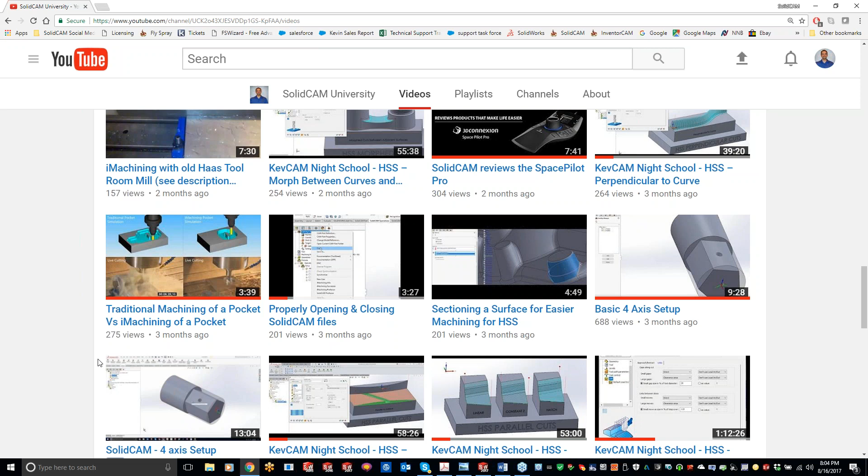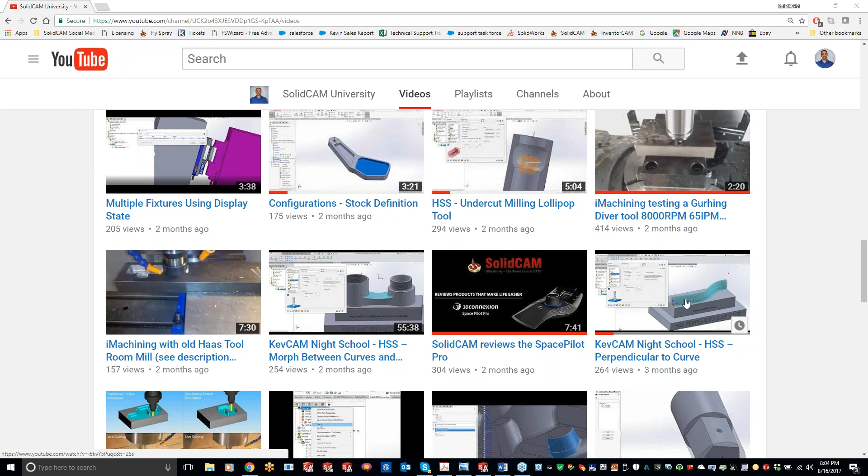But I guess with that being said, let's dive into the multi-axis roughing. So multi-axis roughing is kind of a niche, I guess, for the 5-axis side of things. And multi-axis is more or less just for doing pocketing in a 5-axis environment.

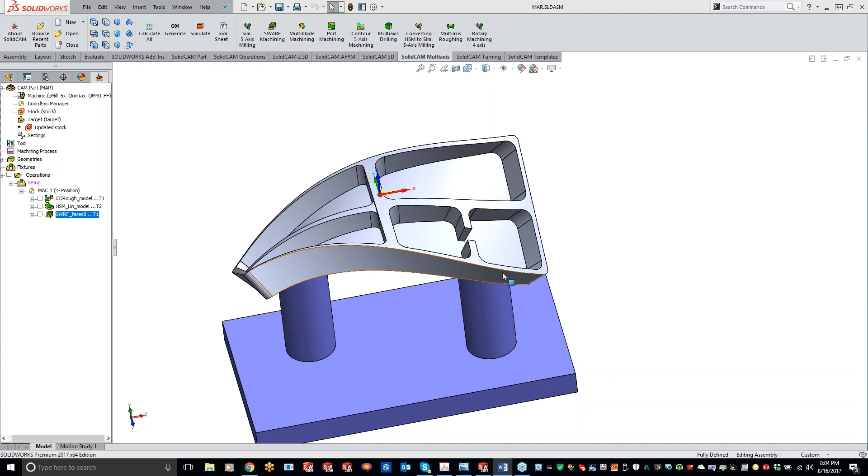So you'll see we have a pretty radical aerospace part right here. And what we want to do is, normally we would have to separate everything off, and we're not going to be able to contour to that floor, the wall surface, or the ceiling - it's just going to be straight lines going across and machining that out. So to actually get down in there and get a good roughing 5-axis cut and get that material out of there, we're going to want to use our multi-axis roughing.

Now there's a couple different options in there, and it's pretty simple to use, but it's kind of a niche area. Personally, I haven't used it very much on the 5-axis side of things, just because it takes that special part that might need it. So a lot of those aerospace parts, or if you guys are looking at doing a bunch of pocketing on a curved surface, this is where it's really going to shine for you guys. So now the curvature doesn't matter.

The sidewalls don't matter either, but we do need to have a floor and sidewalls for this tool path to work. So more or less that's for the pocketing side of things. With that being said, I got this part kind of roughed out.

So we just did some 3D machining, some HSM, and I'm just going to simulate the swarf machining here. We're going to get to swarf machining in the next couple classes, but I want to show you guys what we're starting off with on the machine sim, and then you can see where we're going to take it from here.

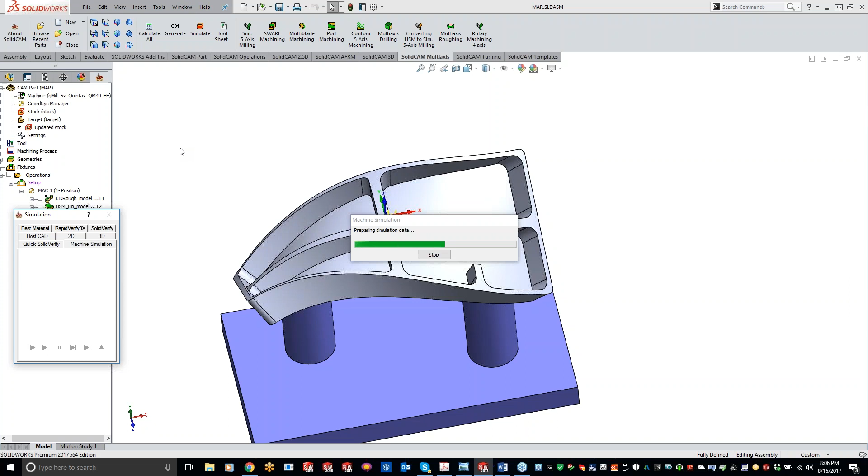So I'm going to load up this machine sim here. Now this 5-axis machine we're using is fairly large, so it does take a hair longer to pull up the machine sim. Alright, now we're getting everything loaded up in here.

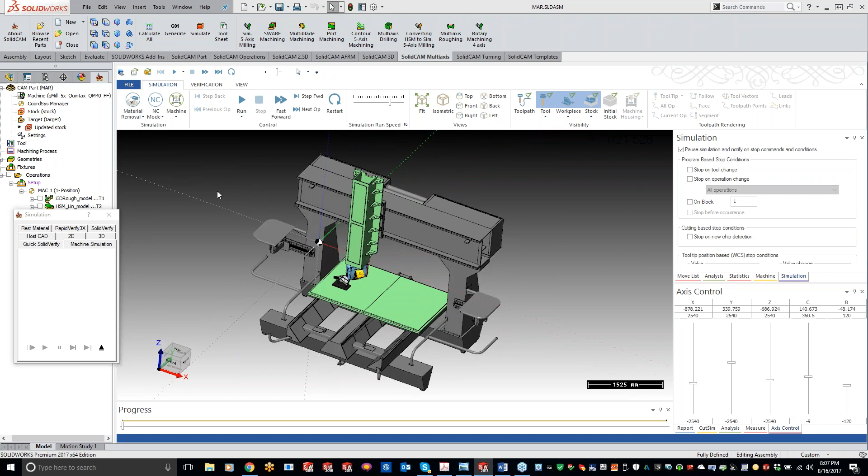Okay, Norm, is this the machine sim that you were kind of looking for? Let's see if he pops in here.

Okay, so it's just got this bolted down to a big table here, kind of using like a 5-axis router. But now we're not using a trunnion to do the 5-axis, we're going to be using this head here.

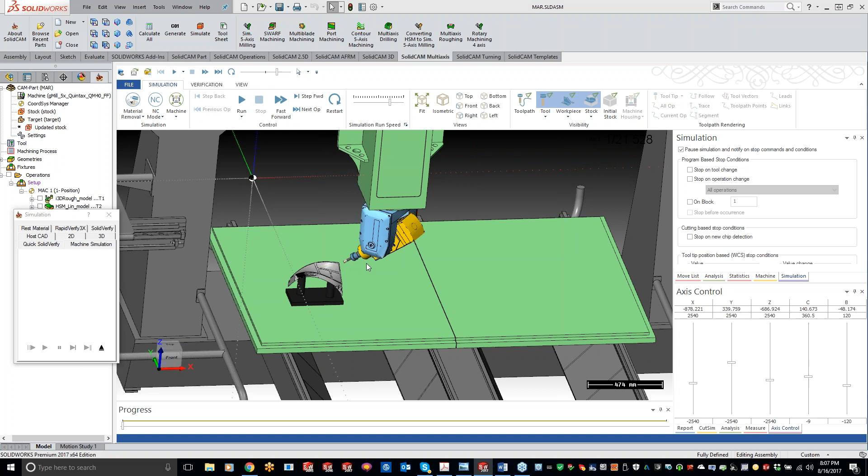So if we just go ahead and play this through here, just kind of going around the outside perimeter, getting everything machined off. You can see where we left off here, let me zoom in. We just got everything roughed out - everything but those pockets inside, the center there.

I can speed this up just a little bit here.

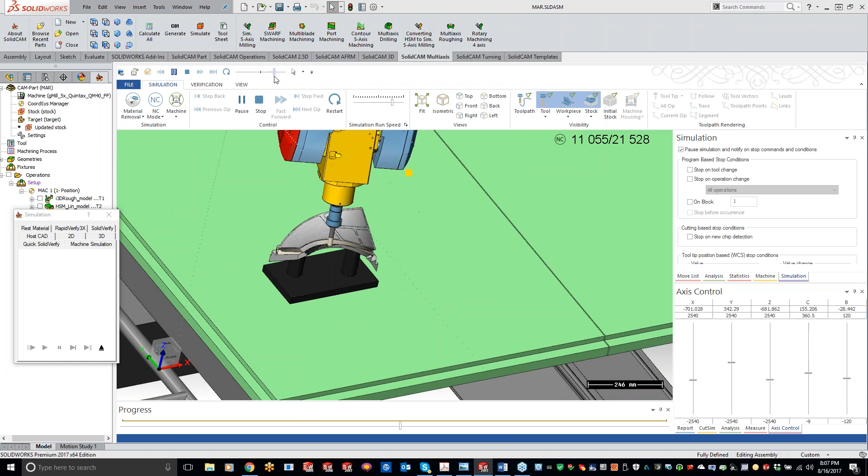Hey Kevin, looks like Norm has a question. Or just answering your question. Oh yep, yes, very very similar to ours.

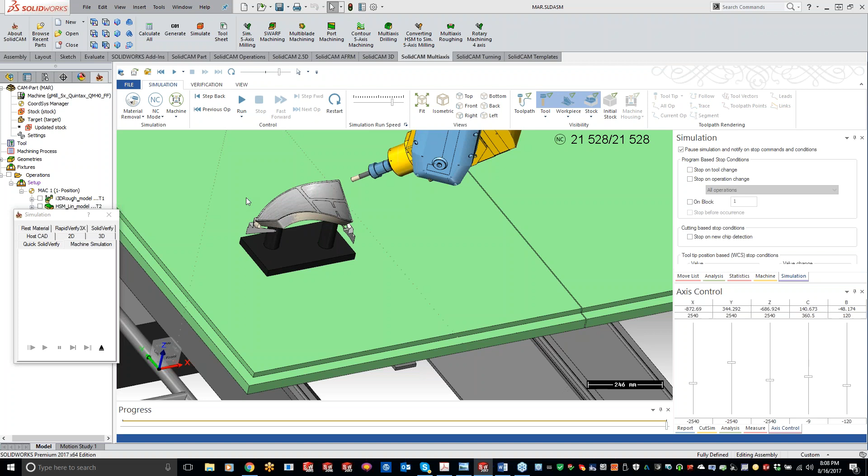Perfect, thanks Norm. Norm, do you have a machine sim for that machine? I got your post that you sent me, or I got the post from the posting, but they didn't have a machine sim on file for you. So if you do, Norm, definitely send that over to me in an email and we can actually use your machine - not next week, because Justin's going to be doing a pretty sweet impeller, but the week after that. Yes, I do. Perfect, yeah, send that over to me, Norman, we'll get that put in here too.

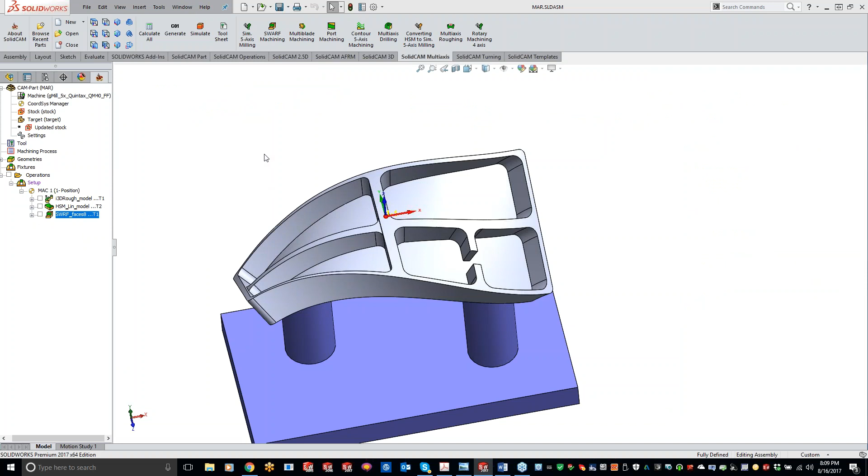So alright, here's kind of where we left off. We have everything basically done all the way around the outside of this goofy part here. Started off with a big block here, but now we need to get in there and rough out these pockets in here. So go ahead and exit out of here, and we'll go ahead and grab our multi-axis roughing.

So we only have one option, it's radial roughing right here. So we can hop down to our geometry.

Now we have a couple different strategies here. We can use offset, which is going to do kind of like a pocket style, where it starts in the center and just works its way out. Or we can do adaptive, which is going to do a spiral. So two different tool paths we can pick from.

Now one other thing is we can do an offset from floor, so the tool path is going to follow the curvature of the floor, or we can do offset from ceiling, so it's going to grab the curvature from the ceiling and work its way around that part.

Or we can do kind of like a morph between boundary curves between the floor and the ceiling. Like we were talking about with 5-axis morph between boundary curves, it's going to take the top and the floor and merge them together. So at the top we're running flat, but then when it gets down to the curvature, it's automatically going to start curving around there.

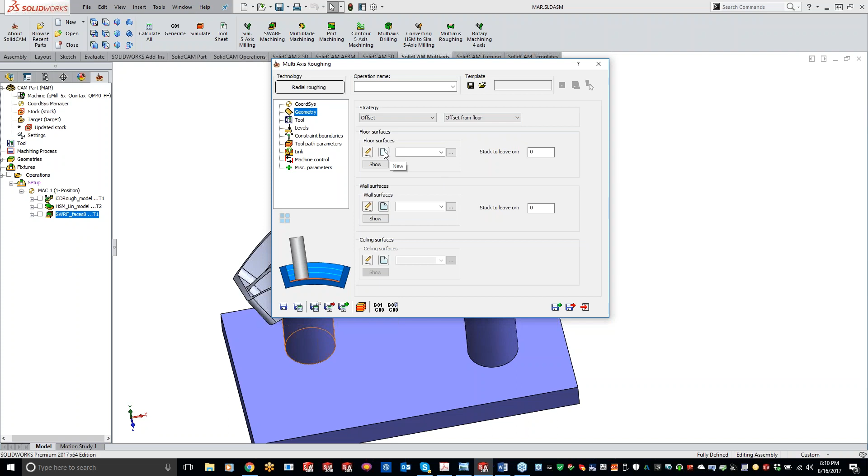So for this one we'll just do an offset from floor, and basically just pick what floors do I want to work on. So we can go ahead and grab these 4 floors here - those are the 4 floors that I want to work on.

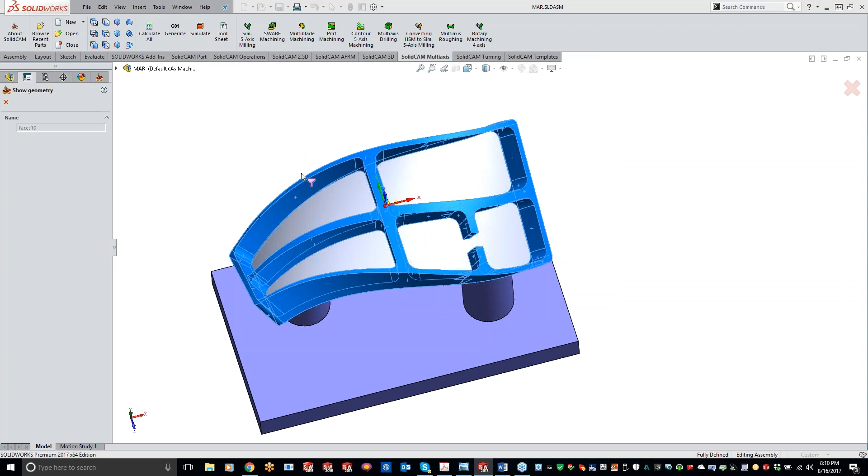And now the wall surface. Now, I already went through and grabbed the wall, but here I'll show you. Grabbed pretty much all the walls that I could here. Now, one thing is, and actually going to be going to development with this, but you guys, when we did

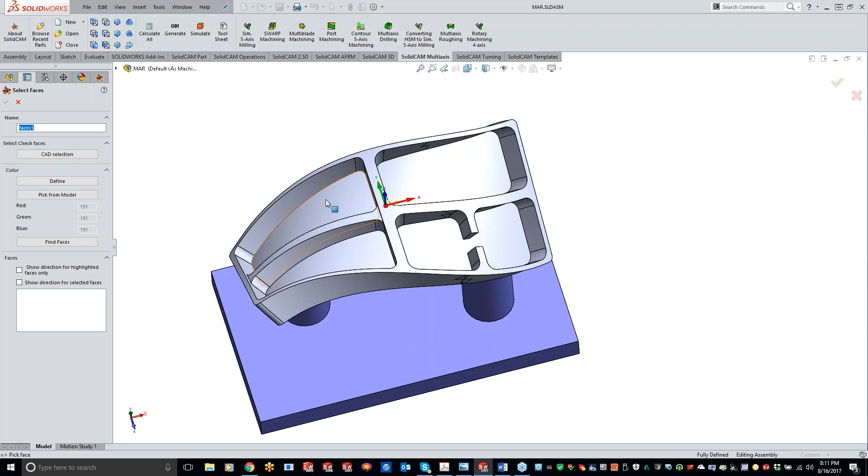the HSS and the check surfaces, there's that button over here where you can say all adjacent surfaces. I'm going to see if they can add that in for us here. I think that would really help out because, when you're working on the multi-axis roughing here, pretty much anything adjacent to that surface is what we want to use as our wall, since we're using pocketing. So I'm going to see if they can get that added in there and save a little bit of click time for you guys.

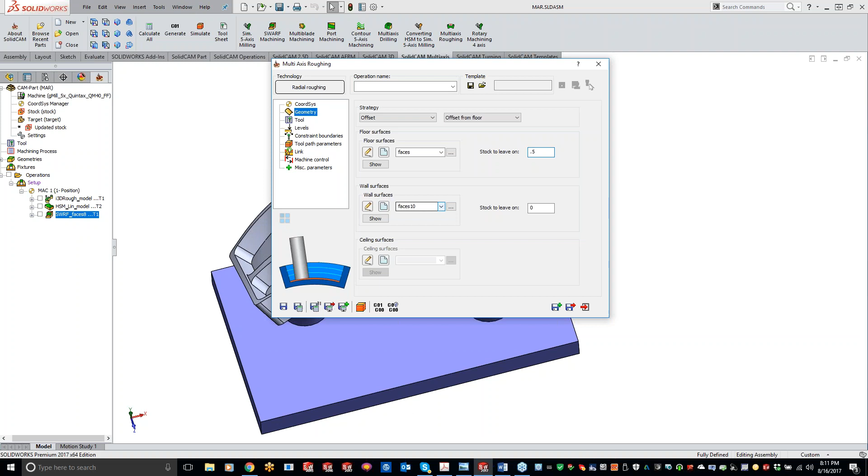So that's the floor surface, the wall surface. Now in this one, since we're just doing offset from floor here, I don't even need to pick anything on the ceiling surface. And we'll do a 0.5 millimeter floor and a 0.5 millimeter for the wall surface there. So we got something to come up and clean up here.

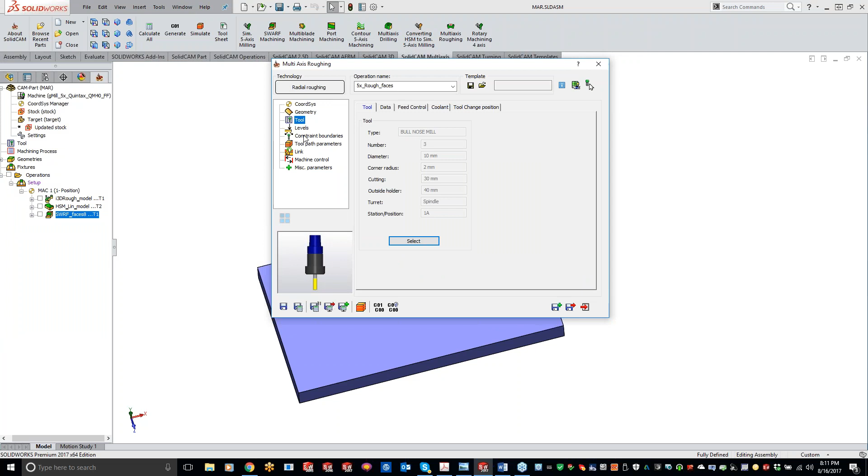And we can go ahead and grab our tool. And we'll grab this 10 millimeter end mill here. Levels, not much in here. Pretty much everything's kind of locked down. The only thing you really have in here is retreat distance, your safety distance, and exit distance, so you can change those around a little bit.

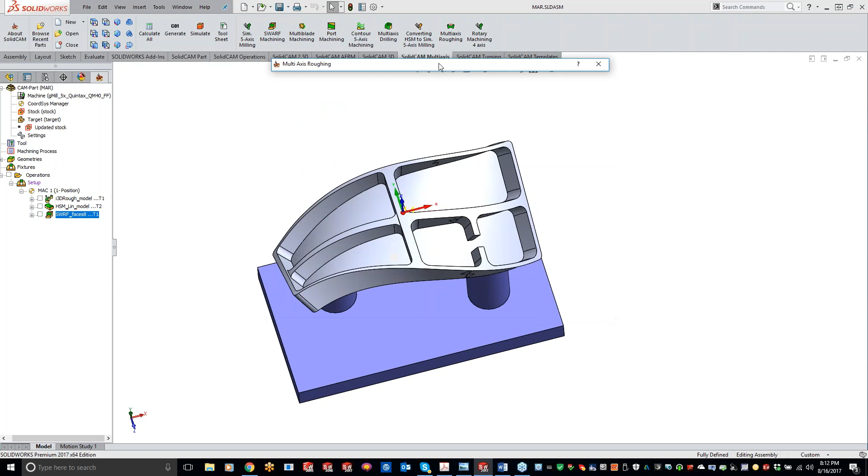Advanced, nothing we can even pick in here. Constraint boundaries. Where do you want to constrain it to? Now, a lot of times, depending on what you're doing, but for this particular one, since I'm wanting to do this entire area, I can just leave it on automatic. But if you guys wanted to, just like HSM, you can come in here and do manual and do a chain around anything that you want to kind of constrain it to a specific area. So kind of a little bit of HSM in there for you guys.

Now, when we get into the guts of things, right here is your step down and your step over. So for this particular part, let's just do a step down of 5 millimeters and step over of, let's go 4 millimeters here. So that is your step down, step over.

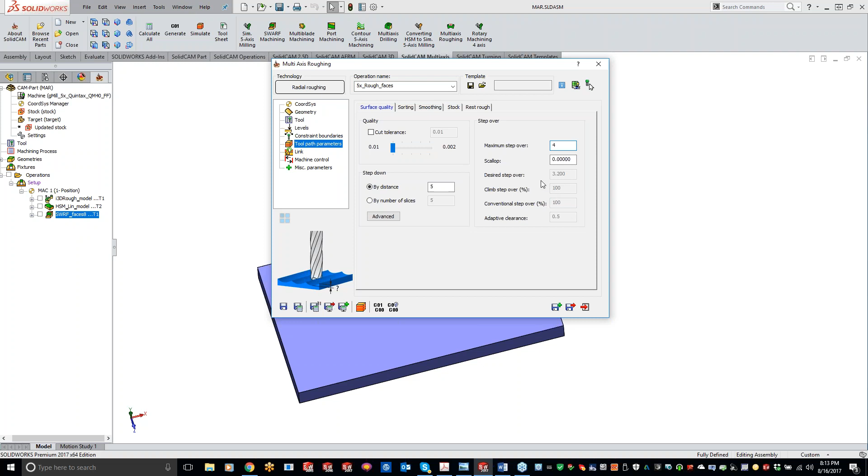Now you'll see right here, over here, we're grayed out, and we don't have that option to change those right now. And that's just because the geometry you picked was offset from floor, but the strategy is what determines that. So when we switch this over to do the adaptive or the spiral, these options will actually open up for you.

So think, and if we go to sorting here, we can do zigzag, climb mill. We can do machine by levels or regions here. Smoothing is just kind of, this portion right here, the default works very well, but basically, do you want to have smooth corners, or we're going to do the sharp 90-degree corners? And same thing with the final cut. And then, if you want to do smoothing between the links, so as we're going from one pass to another pass, it's going to do a little bit of an S curve right there, going into the part there. And you can change up those percentages there.

Now, the filtering right here is basically, you can filter out if you had a hole inside there, so the toolpath isn't going down inside there. And you can pick inscribed circle. What the inscribed circle is going to do is automatically create an inscribed circle to prevent the tool from entering at extremely tight areas of the geometry. So if we're using a 10 millimeter end mill here and we have an 11 millimeter hole, that's going to pretty much stop it from going in there.

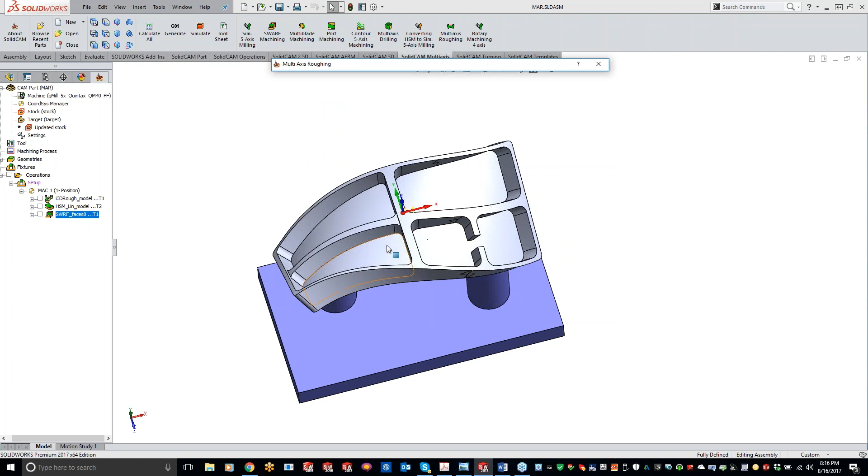What I'm talking about is like when it's working from this section and then coming over to this section, I want to come up to the clearance. But what I want to do is use a ramp going in there, and same thing between my slices. Since it's going direct, I like to go back up to the rapid, and then I can use my ramp. Same thing between regions here, so we can use a ramp right there.

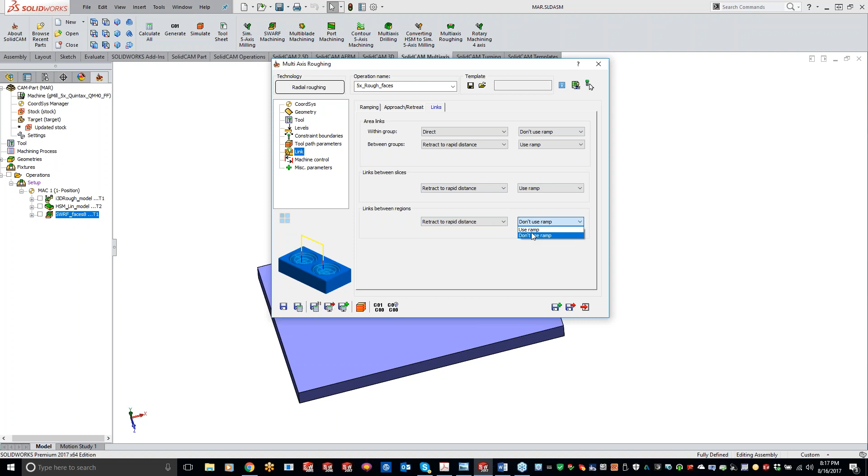One other thing I wanted to mention is your surface quality settings—these are set actually quite tight. What I notice is with the cut tolerance, since we're roughing, the cut tolerance really isn't that important. If you think about it, we're leaving 5 millimeters on the wall, 5 millimeters on the floor, so you guys can open this up. On this part, since we're working metric, I'll just do 0.1 millimeter, and that's going to save you calculation time too, to speed things up.

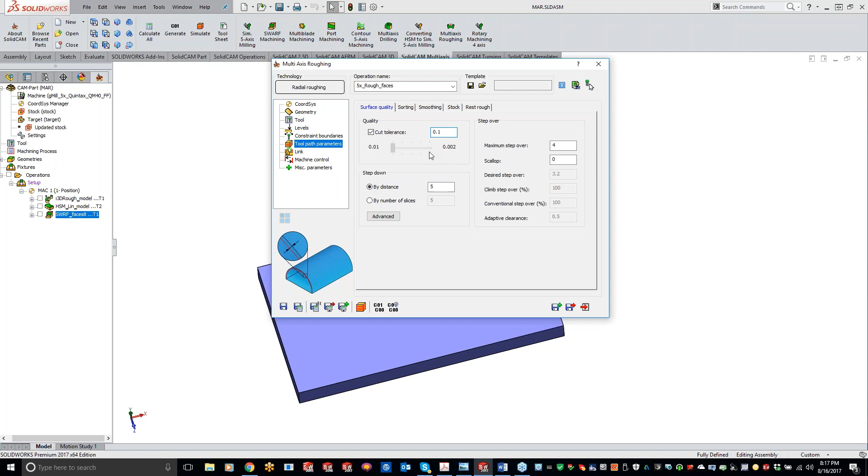So let's go ahead, I think I got everything covered here. Machine controls is your 5-axis stuff. This is the same in pretty much every operation inside SolidCAM, and same thing with the miscellaneous parameters. So with that being said, let's get some toolpath on here.

Now, unfortunately, my computer may just be a little bit slower right now because we just finished doing a live iMachining cut literally 20 minutes ago, and it's still rendering out the video. So it may just take a few minutes or a few seconds longer here.

Any questions with what we've covered here so far? Like I said, this one's a little bit more of a niche kind of area, but it works very well.

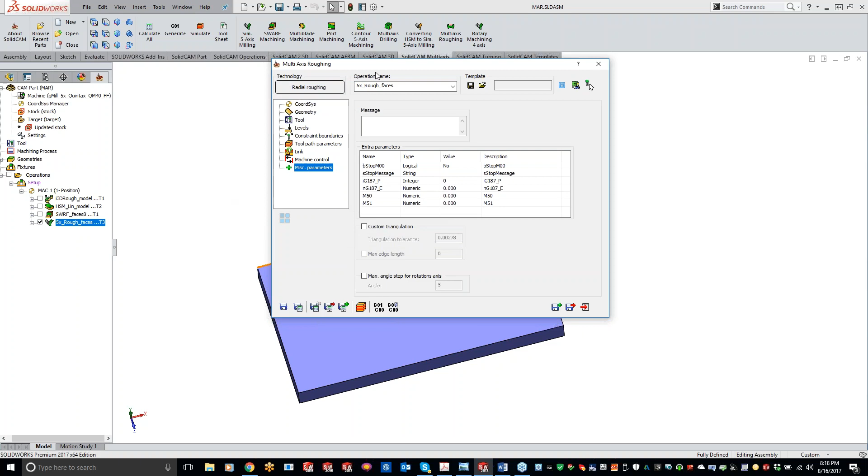Okay, so you can kind of see our toolpath. Let me get a little side view here. Our toolpath is following the exact curvature of that floor, going all the way around there. To get a better picture, let's do a simulate, and we'll start off with solid verify first—get our updated stock going here.

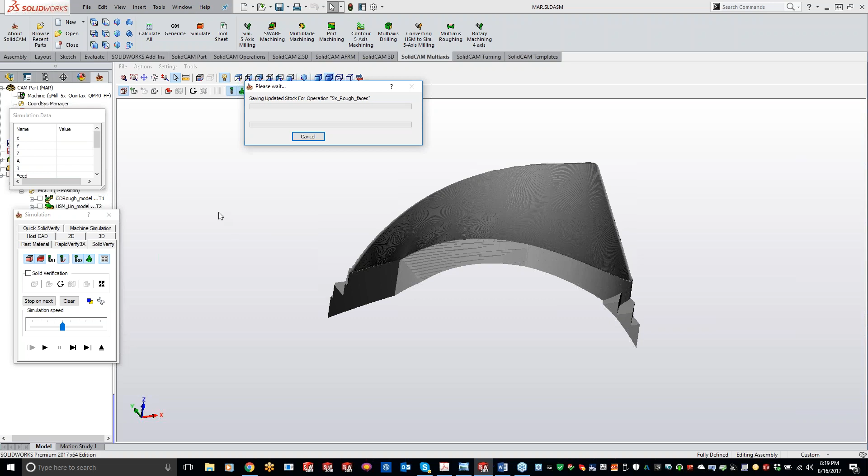Come on—boy, that video rendering is really bogging down my computer right now. Okay.

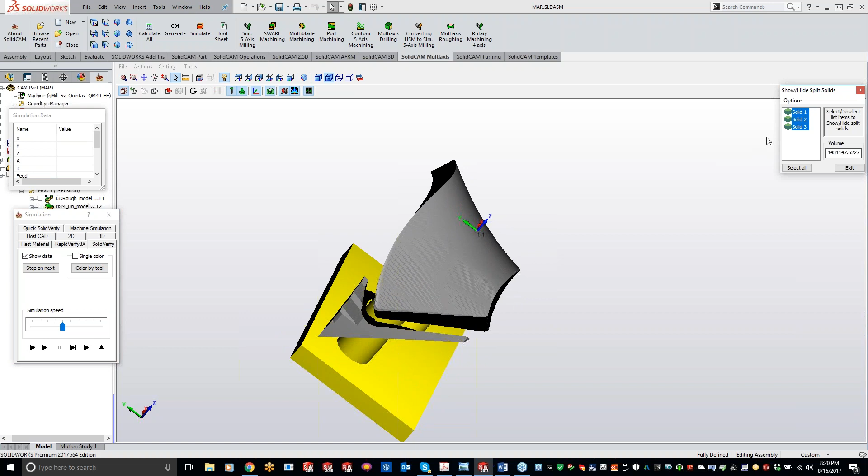So we've got our part in there, and these are just the pieces that were left over. If I want, I can come in here—I think it's this guy. No, that's my fixture. And I can get rid of those slugs that would have fallen off there.

All right, let's play this through here, and I can speed it up here. So you can kind of see the tool is following the curvature of everything that's going on there. Oh, and one thing I'm noticing here, you'll see I didn't go down to the full depth, so what it's doing is coming over and doing each pocket at that level, moving over.

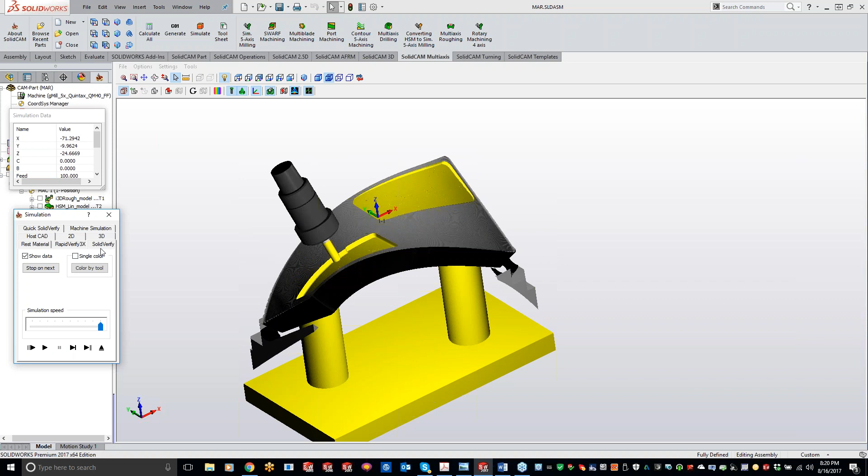Let me just stop this for a second, and let's get that fixed.

So if we go to toolpath parameters, let's see where they hide that at. Toolpath parameters, sorting, and I'm going to go by region. So what that means is it's going to work on one pocket, get it all the way down to size, and then once it's finished off in that one pocket, it's going to move over to the next pocket.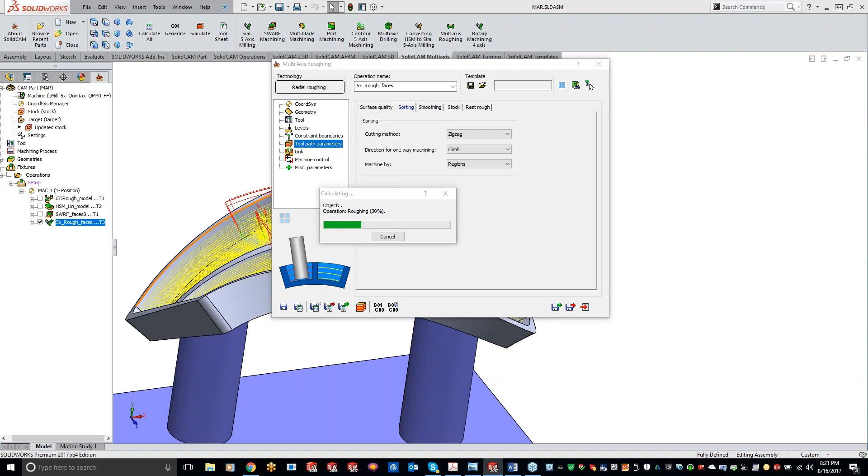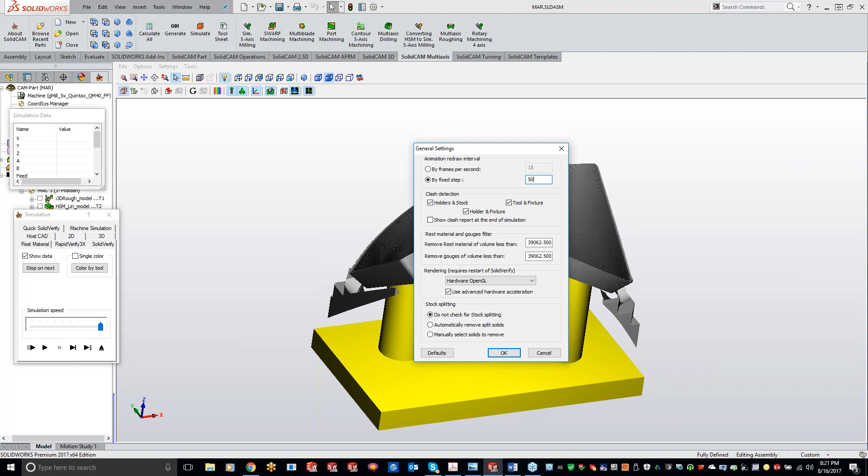I'm going to simulate this here. Do solid verify again. And I'm going to bump up, let's do every 50 lines of code here.

So now we're kind of staying within that one pocket, and then it will bounce over to that next pocket here.

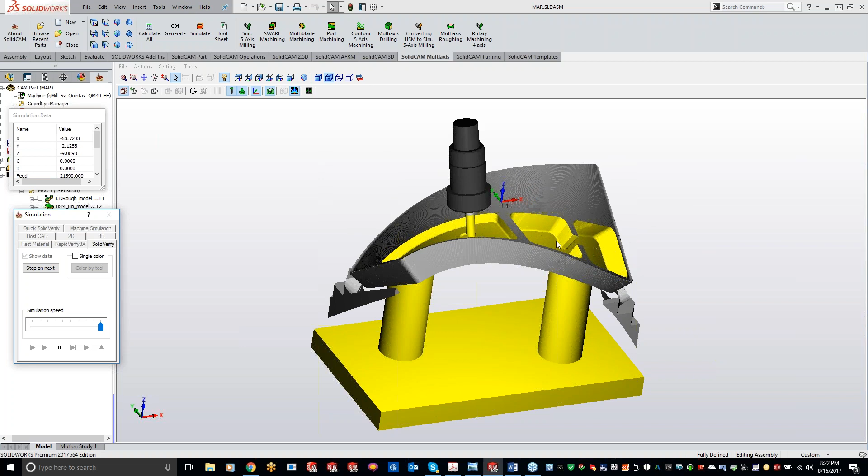Now, one thing that I found is you don't have much control on where it goes from the pockets. Even though I think I picked over here starting on this pocket when I click those faces, it really is out of our hands where it goes. I think it just kind of goes by the fastest route possible when you do by regions instead of by lanes.

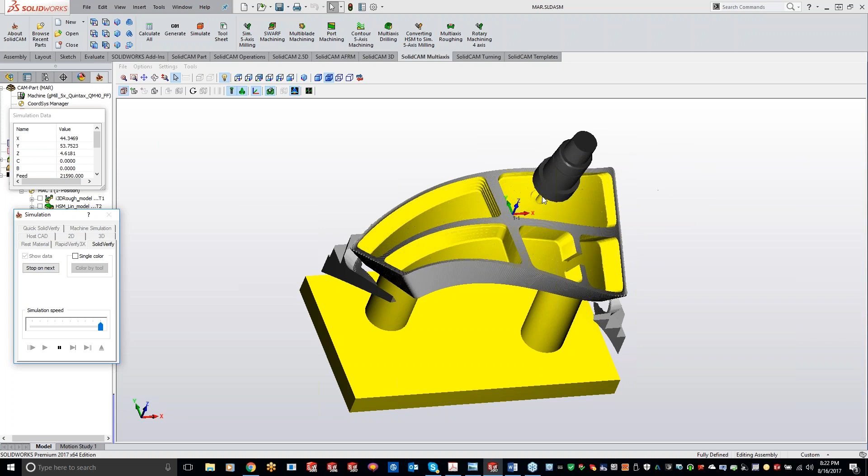But let's stop this and let's hop over to machine sim, and show you guys how that head is moving around in there.

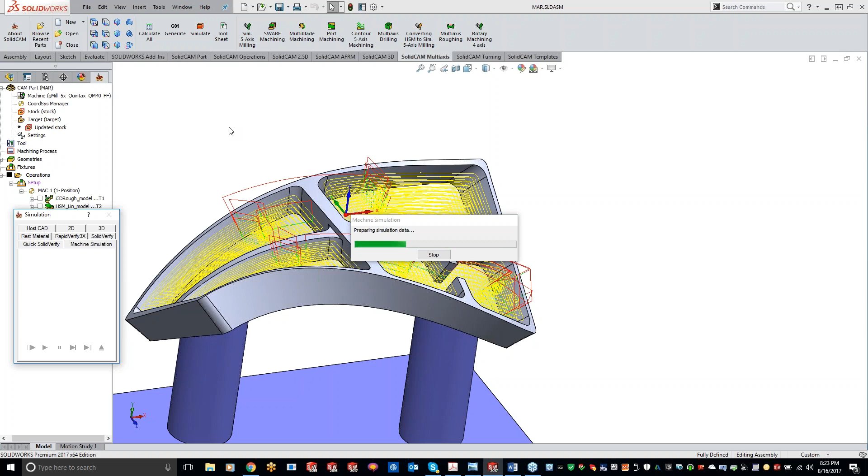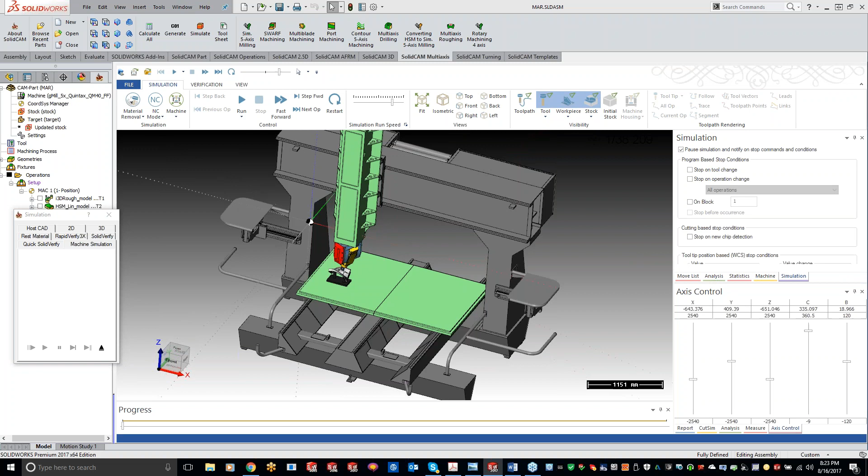All right, get everything loaded up here. All right, let's get zoomed in here. And slow it down a little bit here. You can see the head really working its way around in there.

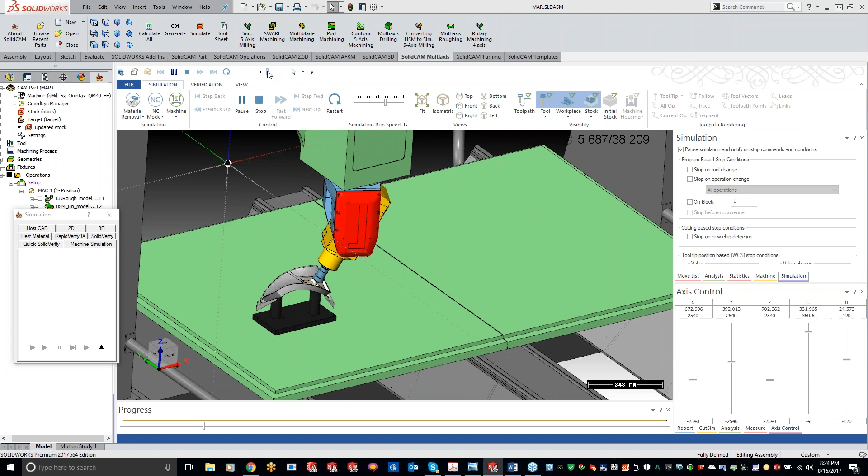And then each time it's going down in level.

Hey Kevin. Yeah, looks like we got a question and then a follow-up from Ben. Can you see that, or you want me to ask it to you?

Can you make a smaller hole and then enlarge? Yeah, I don't know if that's easier there. Let me... Okay, but I can't even be trusted to read the questions. That's how little I know about what I'm watching here, guys. So I'm learning a lot.

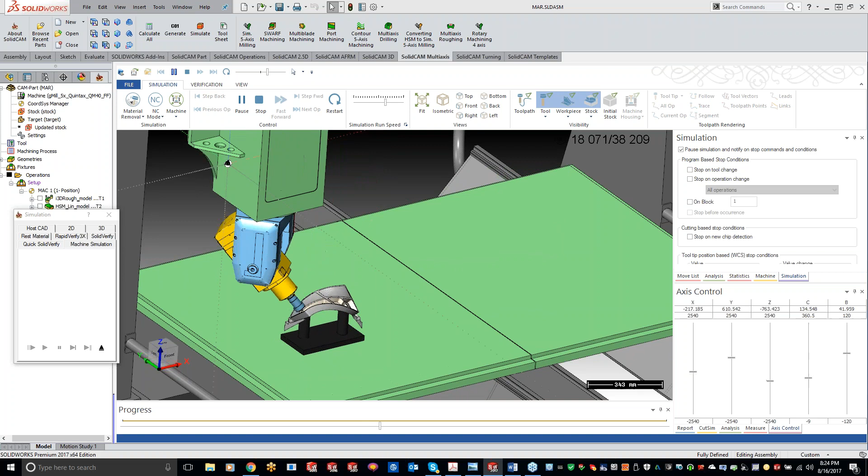Okay, so can you make a... Ben, are you talking like do a pilot hole, and then it approaches in from the pilot hole? Let me check here, once this gets done playing through. I don't think so, I haven't really played with that portion of it, but let me see if we have the option for that.

Can I give you a different view here, you guys? And is everybody able to see that machine sim working?

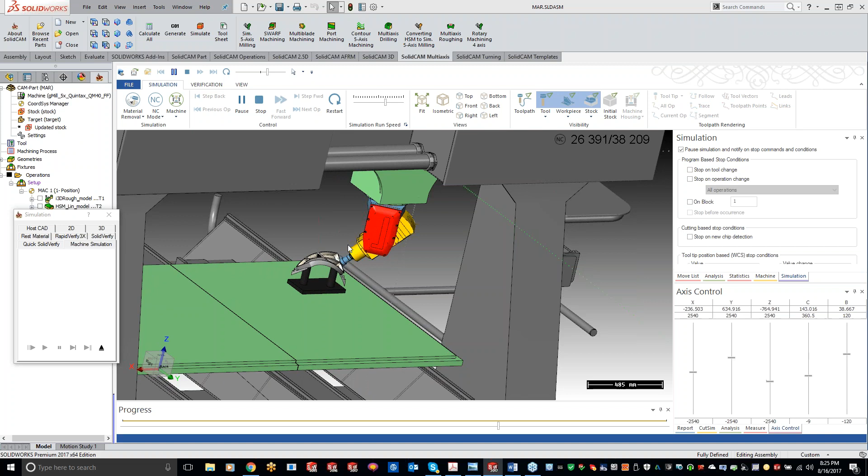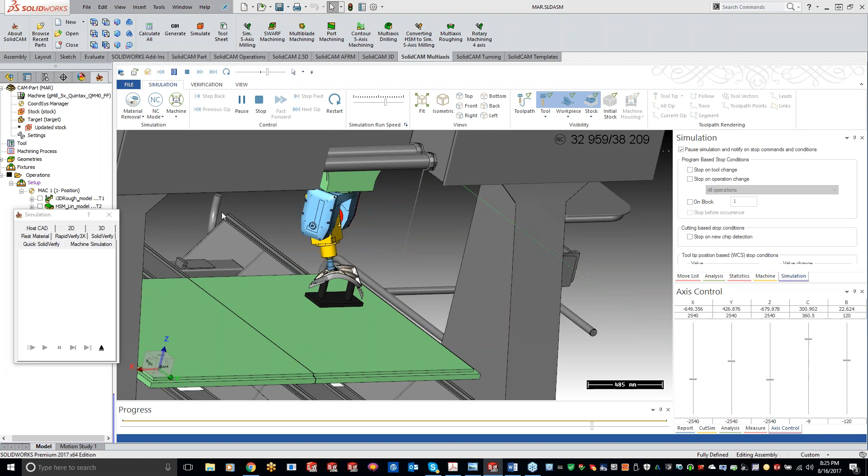What are you saying, Andrew? You couldn't program this part? I could do it in my sleep. It wouldn't look like that, but I could definitely do something. And for those of you that don't know, both Andrew and myself have very young kids, so we don't get sleep period as it is.

All right, so yeah, that's probably what I should do with my nights. Instead of even just pretending that maybe I'll get some sleep, I'll just go through and take all your classes. So yeah, there you go.

We got another question or follow-up from Ben. All right, the reason I was asking was to use more of the tool length for roughing. Yeah.

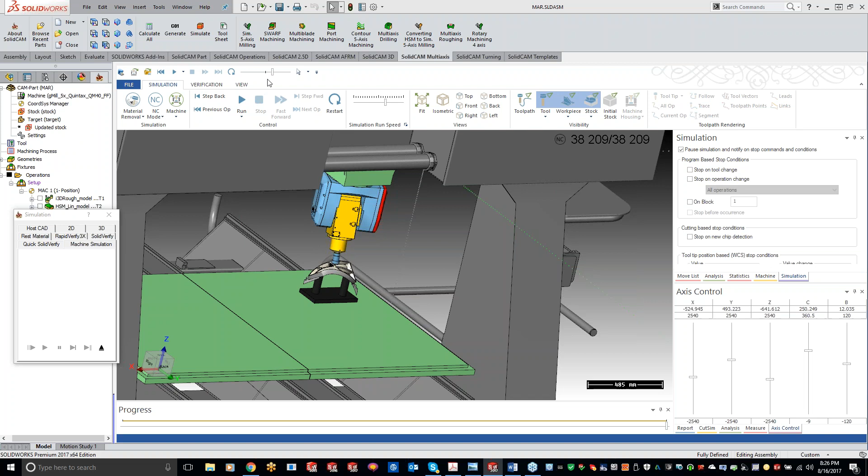Let me hop out of here. And so if we go down to the toolpath and surface quality, I can take a larger step right here, but let's get into the link here and the ramping.

Now, I guess I don't have a hole in here, but I don't see any option. But let me tell you what, Ben, let's see, was it Ben? Yeah, Ben. Let me do some digging on that and see if that's a possibility, that if we can start off with a pilot hole, that way we're not wasting the time doing a helical entry going down in there for you guys.

But any other questions on this particular toolpath?

And great question, Ben, too, by the way.

All right, so now we've got a couple here. Hang on, we got... No, I think we're good here. Oh, that's it, sorry, yep.

False alarm. Okay, maybe I can come down to Atlanta and see what we can do. Oh, absolutely, Ben. Come down and Ken will get you all straightened out.

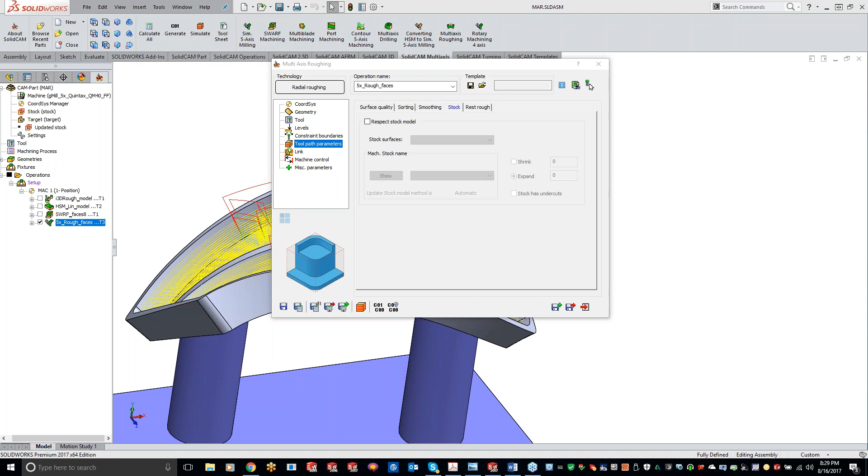But okay, so now we have the center completely roughed out. Now what I can do is kind of use this as a finishing toolpath too. So what I'll do here is open up this operation, and I'm just going to do a save and copy here.

Our geometry is going to be the same, but now what I'm going to do is switch it over to adaptive and show you guys the spiral and finish off the floor, I guess. So what I'll do is take off my floor finish, or my stock to leave on the floor.

And then the only other thing I want to change up here is my surface quality. Since I have everything pretty much roughed out here, I can take this all in one step and just come down, because I just had that 0.5 millimeter left over. So instead of doing by distance, I can do by number of slices, and I can change this. Basically, think of slices as cuts, by number of cuts.

So when we do 5-axis, you guys have the option to do limit by number of cuts. That's basically kind of what I'm telling it to do right here.

Now you guys also see that since I switched over to adaptive, I get a little bit more options here. I'm going to leave everything kind of as default, but you can do a desired step over. Right now we're doing a maximum of 4 millimeter step down, or step over, but I can put a desired number in there and get a little bit tighter of where I'm going.

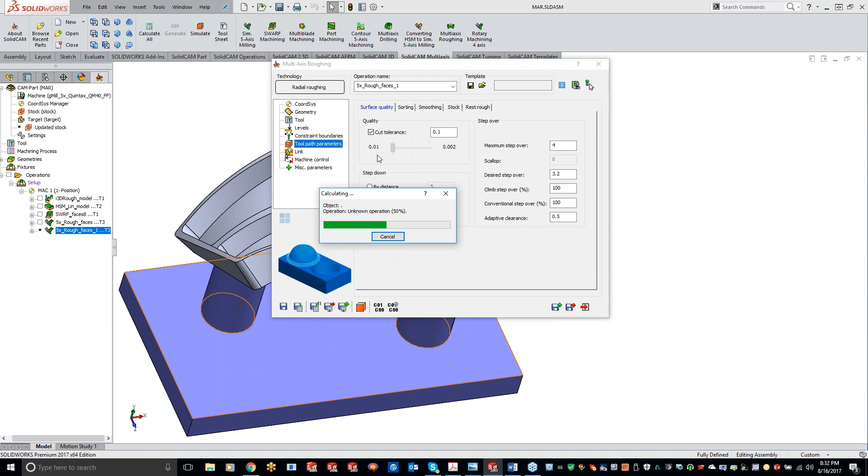Now, I can set this down to 0.01 millimeters, which is pretty tight, but what I noticed is I'm getting quite a bit longer G code and longer saving calculation time, but I'm getting the same surface quality as before when I had a smaller versus larger cut tolerance. So definitely feel free to increase that cut tolerance, you're going to get the same results.

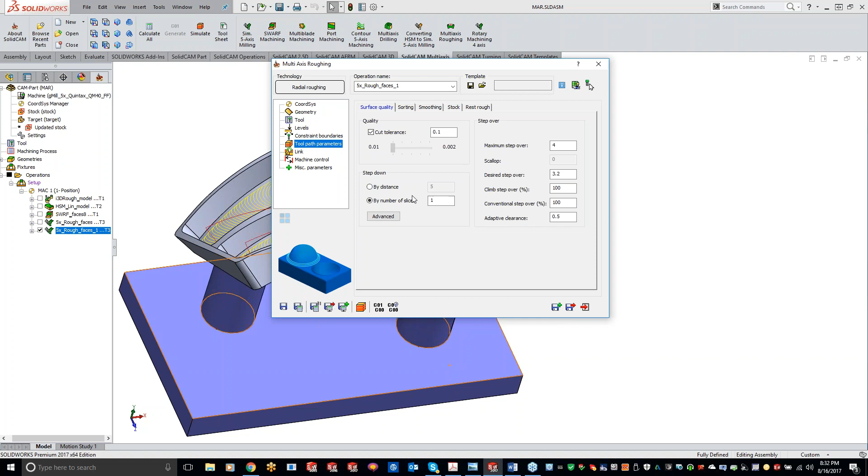Ben had mentioned here about the tool - you got to watch out so the tool doesn't load up when plunging. Yep, absolutely, we've had that scenario. We were actually doing a live cut with that scenario, doing a helical ramp in there, but it was almost a plunge cut.

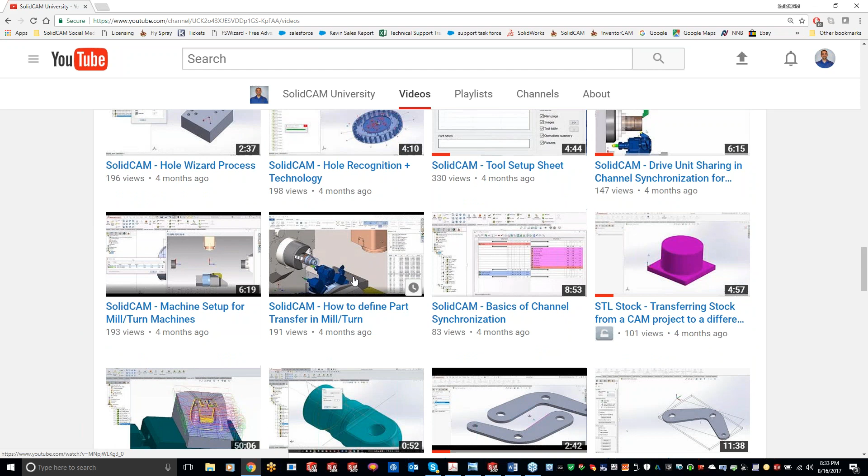For those guys that haven't seen, I did a video - let's see, it's a pretty cool one, let me see if I can find it real quick. It was using that Gurhing diver tool. It must be up here. For the record, Ben, I thought the same thing when I was watching that. Right here is that Gurhing diver tool.

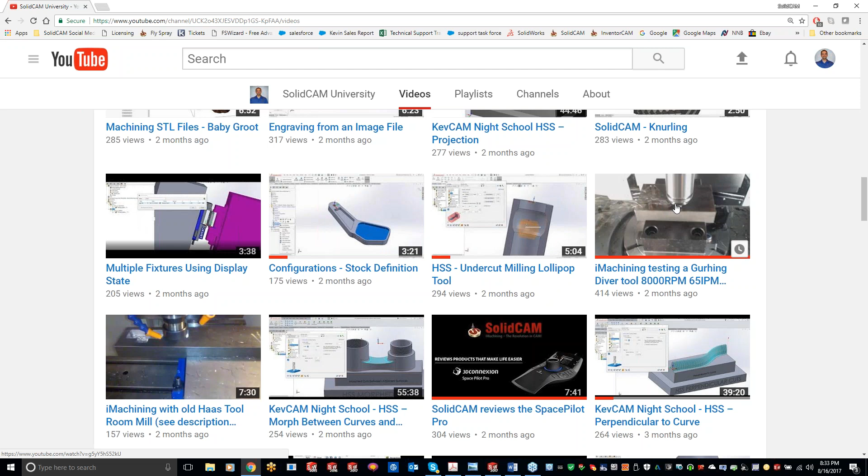What actually happened is we were doing a live cut, and we used the same angles and approaches for that Gurhing diver tool versus just a regular flat end mill, and we actually loaded up that end mill as it was kind of coming down. So definitely a great point there.

Okay, so now you can kind of see coming in here, doing a nice spiral, working our way down, starting in what it thinks is a good spot, and just doing a spiral, working its way around. As it gets to where it can't spiral or morph anymore, it does kind of iMachining, doing that trochoidal, working its way around. The only difference here is it's not picking up as it comes around - it's just kind of race tracking.

So if we go and play this through, let's try solid verify first here and show you guys. Get everything updated.

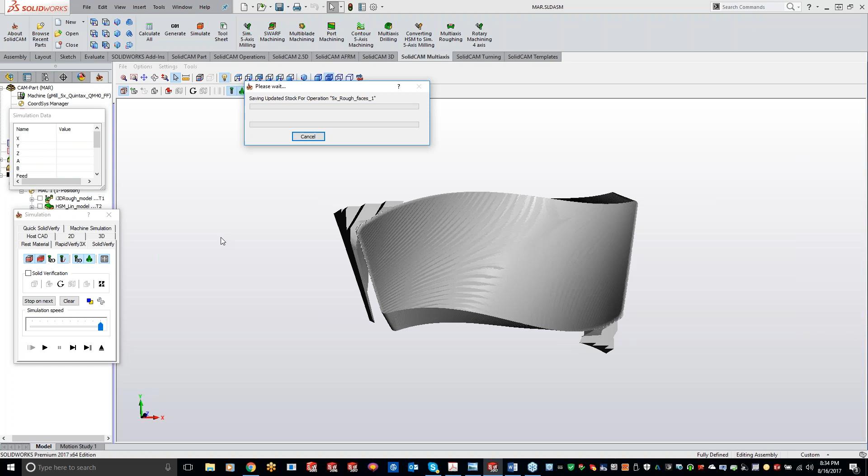All right, here we go. Rather than a spiral, can you follow the form right? From Ben - let's see, spiral, can you form right? Can you give me a little bit more explanation there, Ben? I guess I'm not sure what you mean by form right. I guess, Ben, you have me a little confused.

Oh, kind of following the rectangle surface. Yeah, that would be more or less a diagonal kind of coming in, and yeah, we can definitely play around with that real quick here.

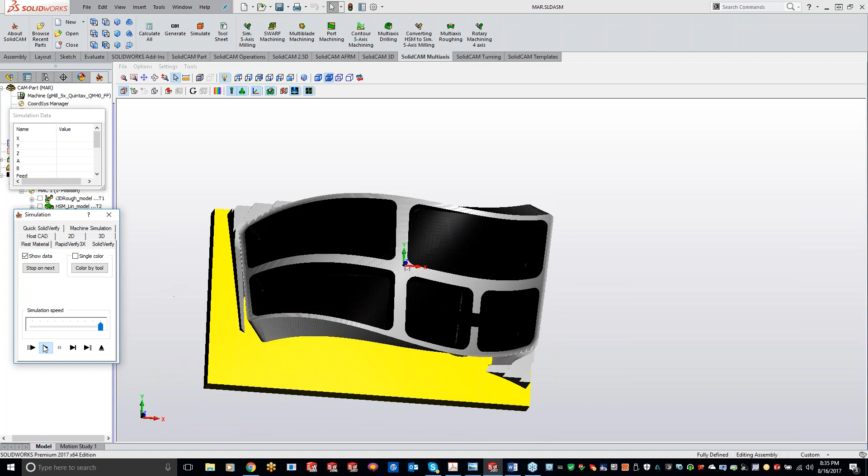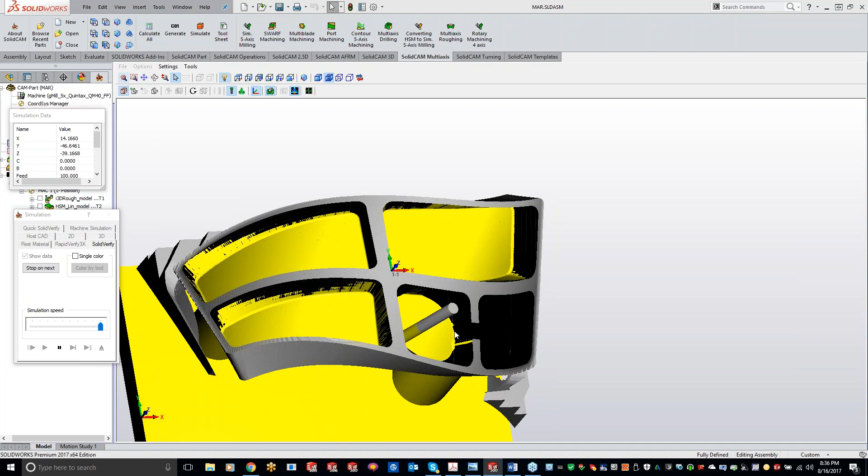I'll go ahead and play this through here, and let me get rid of that tool holder so we can kind of see what's going on here. Doing the zigzag, going back and forth, pretty much just cleaning up that floor is basically all we're achieving here, and doing a spiral for the most part, or morphing, I guess you want to call it. Then when it gets to the walls, it switches over to that morphing spiral, or I'm sorry, that trochoidal movement.

There we go. And if we want, let's go ahead and play this through machine sim real quick so we can kind of watch our head rotating around.

Something with this, I don't know if it's such a large machine, why it takes so long to load up here, but we'll blame that one on Norm. He wanted to see a head rotation, so just kidding, Norm.

Okay, so let's kind of get positioned in here, and we'll slow this down a little bit. And basically what it's doing is it's keeping that tooltip orthogonal to each cutting position.

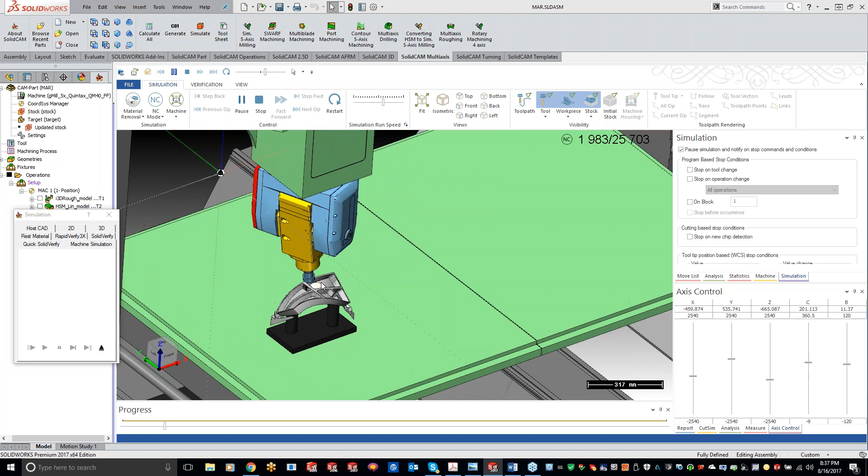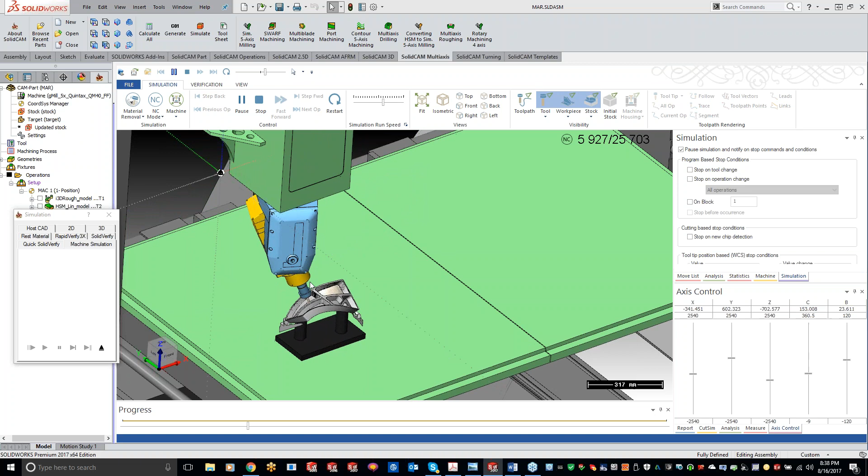Now I know we talked a lot about that with the 5-axis last time, but pretty much working on that tip. We don't have the option to work more on the side, using that lead lag angle and side tilt angle, like what we did before. So this will get you a pretty decent finish, but if you're looking for that perfect finish, we want to use a different strategy, one of our 5-axis ones that we were talking about for the last couple weeks, or actually a month and a half.

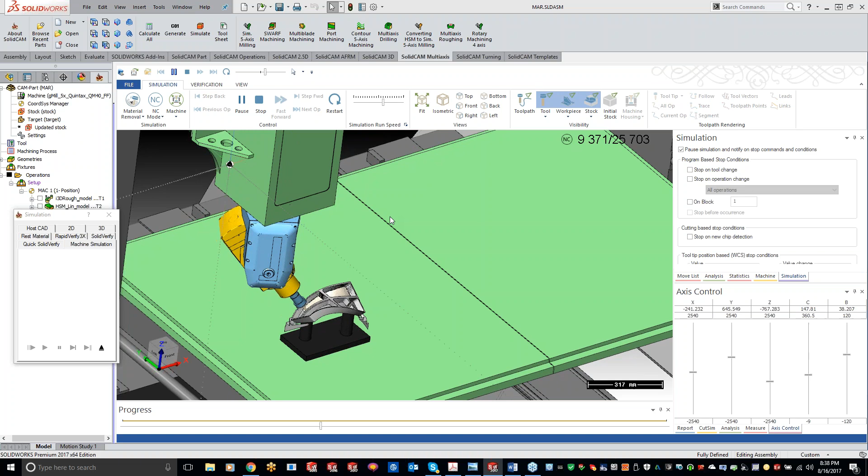So we can tip over, and instead of using the tip of that ball, we can actually use the side of that ball a little bit, just getting in there and working its way around here. Speed up just a little bit for you.

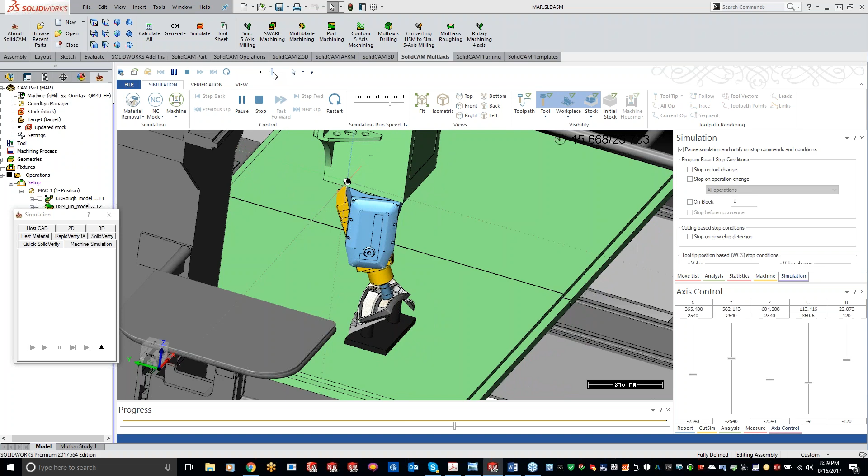Now let me ask you guys this. Have you guys ever run across a part like this before? It's a pretty gnarly part here, and my dad does a lot of work for Northrop Grumman, Lockheed Martin and Boeing. He said they see parts like this every once in a while, but it's like they took it flat and just twisted it.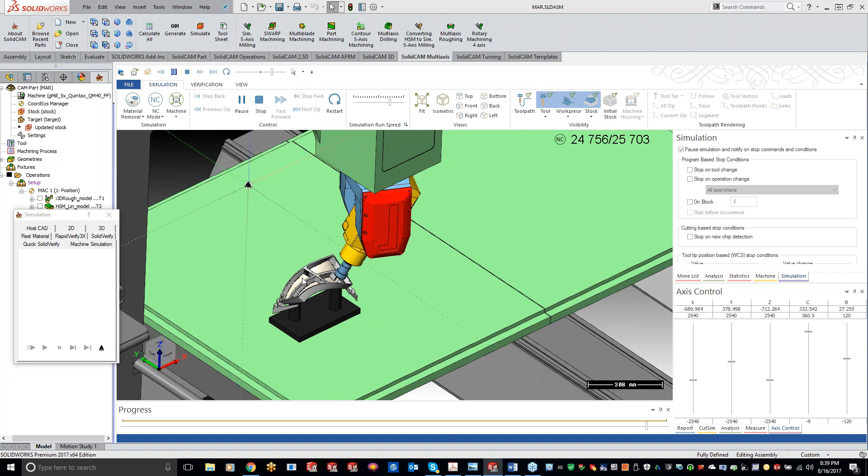But so there we go, kind of finishing off the floor there. And now to answer your question, Ben.

Let's see, where did I go here? Ramping. Got a couple questions there, Kevin. Okay, so we got line right here, and let me just do a save and calculate.

Let's see, line ramp angle must be less than 90 degrees. So let's do a ramp angle of 5 here.

Okay, I'm a little confused here. Ramp angle and adaptive roughing must be equal to 90 degrees. But when I had 90 in there, I didn't like it.

All right, well, this is calculating. No, my last CNC 4-axis machine was in 1985.

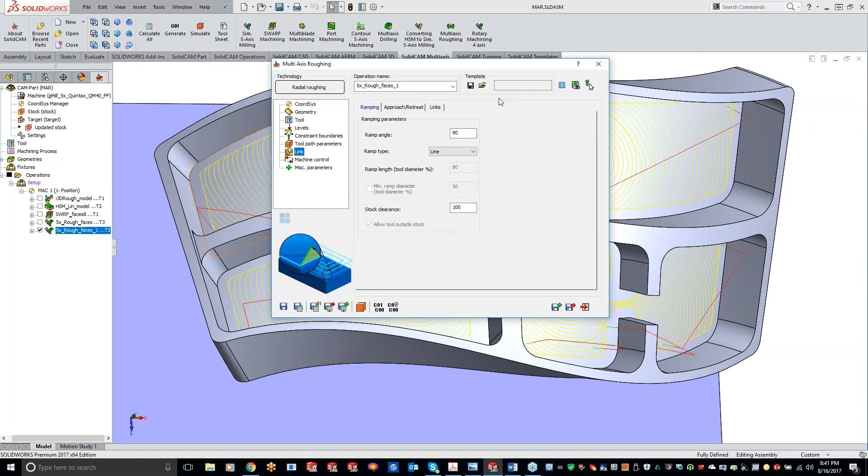All right, so if we go line, it's not doing much, looks like almost a straight plunge when we use line. Let's try, if we do profile, I wonder if it will follow - it should follow the profile.

Must be automatic line. Okay, so let's go to helical, or let's just exit. And since we are using it, it's telling us profile now.

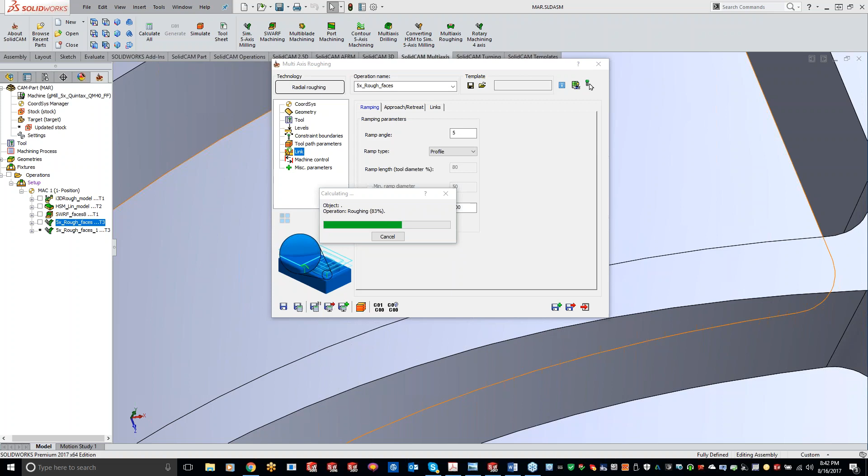All right, so let's take a peek and see. So yes, it is, we kind of get this top view down here. It is following - I'm just looking at this one yellow line right here. So it is following the curvature going down into the material that way. So we're coming straight down, comes right above the material, and then does follow the contour of that profile going into that material. So to answer your question there, Ben, yep, it can be done.

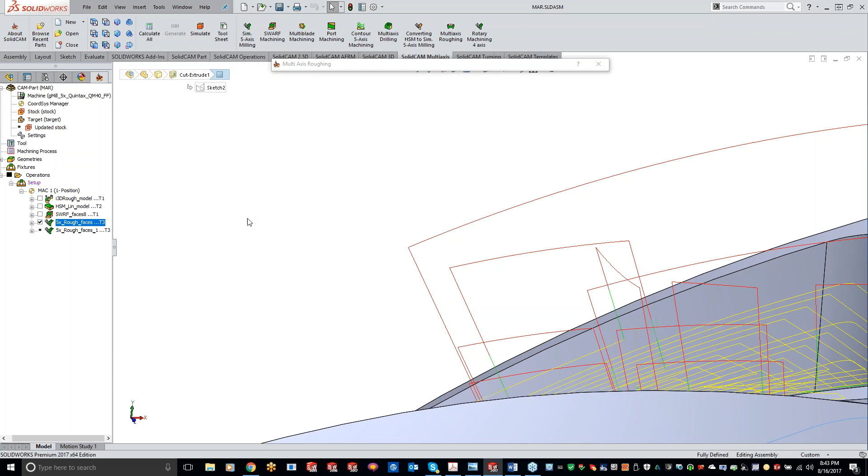But any other questions, guys? I guess that's kind of all I really have for tonight. I know there's a lot here, but it's pretty simple. Like I said, you don't have a whole lot of options with strategies, but you can do the offset or the adaptive, and then pretty much, do you want it to follow it from the floor? Do you want to follow it kind of from the ceiling, or do you want to find that middle point? And if we got a flat top and then a curved surface bottom or a floor here, kind of slowly, gradually working in.

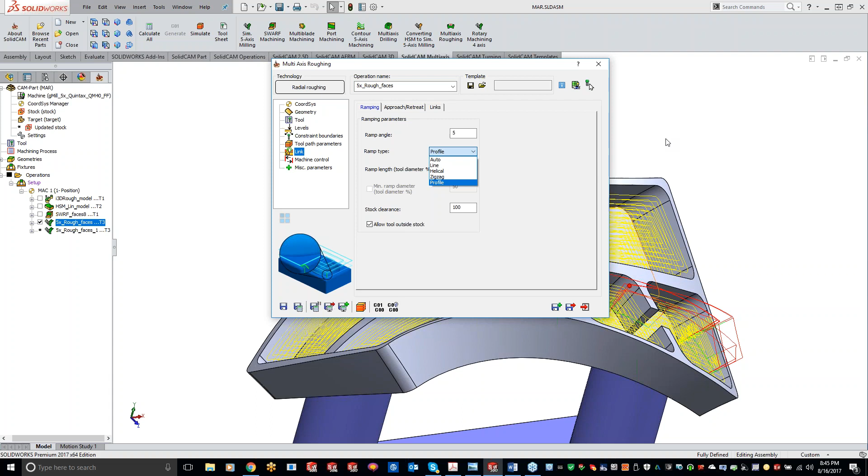Yeah, absolutely, guys, and definitely, like I've been saying all summer, I know there's could be better things you guys can be doing outside when it's nice and warm out. Well, I guess for me it's a little different, because in Minnesota it's like we only get about 2 months out of the year where it's nice and warm out, and the rest of the months it's frozen everywhere. Yeah, you really can't blink too long. I'm with you, I'm in Pennsylvania. Yep, live it up while you can. Yep, but definitely - oh good, got a question here from Norm.

Were you going to show us how to send a machine sim? Oh yeah, send machine sim. Yeah, thanks, great, Norm. Forgot about that.

For those of you that want to see your machine sim, send those over to me. I'd love to show off the machine sims. So right-click on CAM part, and first make the file a little bit smaller. You don't really need to throw any tool path on there. If you just pick your post and know that one has the machine sim, you can send me just no toolpath with just a part on there, and I won't even use a part.

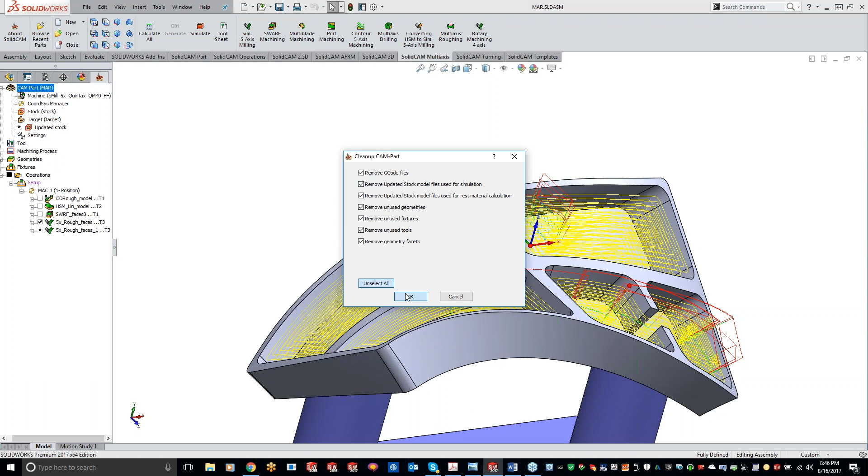What that does is, if you come down here, you can do a cleanup CAM part if you do have some toolpath on there. This will eliminate any G code that's kind of stored up behind the scenes, or stock and all that stuff. So you can just do a select all, hit OK. It's going to remove all that unnecessary stuff that wasn't being used.

Then you can do a send to, click folder, and use the including machine sim option. You'll get a dialog that pops up like this that says package for technical support or end user, and do technical support because I need all the goodies inside there.

Send that, and definitely send those over to me and I'll start using your guys' machine sim. The more we can show each other, especially since we have a bunch of people in the class here—if I get all your machine sims, throughout the 5-axis I can show each one of your machine sims on different parts.

So definitely send those over and get those applied right away. Next week Justin is coming in and we're going to do somewhat of a 5-axis session. I'm more on the simultaneous 5-axis milling wrap up, and Justin's going to do some live programming in front of you guys on an impeller using different shaped tools, different strategies, and areas he's found that help, kind of tips and tricks.

After that, we're basically working down our list. Tonight we did our multi-axis. Next week's Justin, and then we'll get into swarf, doing some multi-axis drilling, contour 5-axis, 3 to 5-axis convert from HSM—that's a really cool one—and then rotary machining.

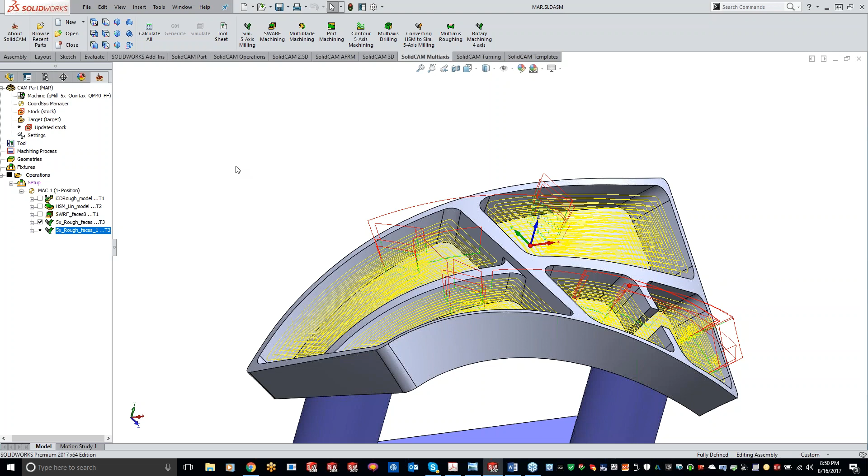All right guys, have a great night. Bye-bye. Thanks, Kevin. See you guys.